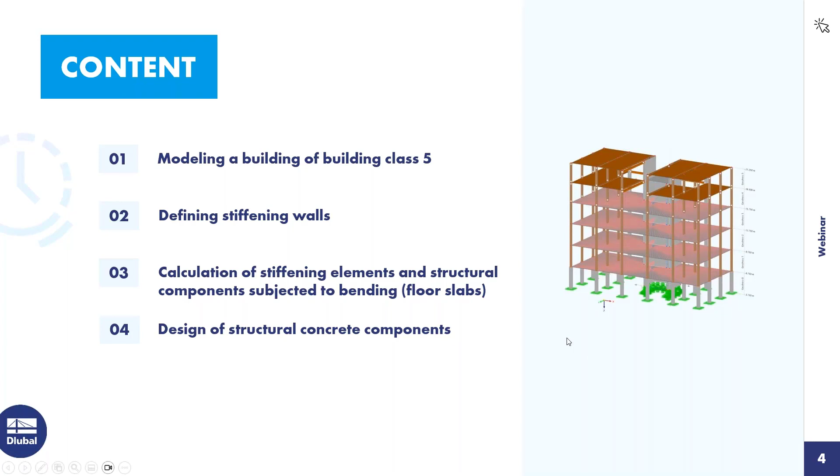To the agenda today: Bastian will start the presentation. He will model a building of building class 5. You can see that in the preview. He will define stiffening walls and will do the calculation. Then he takes over to Paul, and Paul will design concrete components such as a slab and a wall. Okay, then I hand over the screen to Bastian. Bastian, it's your turn.

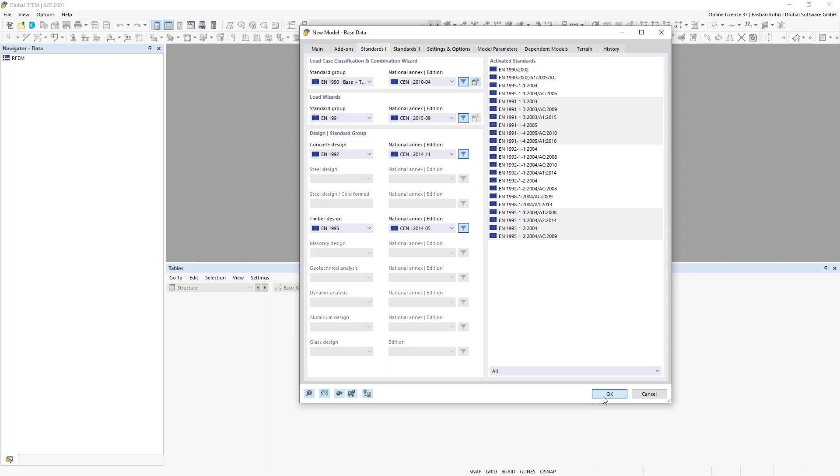Okay, thank you. Andreas said it already, I will do the modeling stuff. Basically, for this, I will define a new model with the add-ons we will need today. That's the Building Model, the Multilayer Surfaces. We will have a hybrid building made from concrete and timber. Therefore, I'm also activating the concrete and the timber design. But Paul will do the design process afterwards. So it's just for the sake of completeness. So we have the standards available here for concrete and timber, and also the combination for this.

Then I will at first define the ceiling made from concrete from the building that you just saw in the presentation from Andreas. I will not define thickness, materials, and cross sections in detail, as there are other webinars dealing with this. At first, I'm using a surface of 30 centimeters thickness with a C30/37 concrete material. It will be in the XY area with the dimension of 9 and 20 meters.

Then for the columns in the structure, I will divide the line here for arranging them by 2, and I will copy this for the other columns in the X direction 5 times by 4 meters. Okay, that was wrong, sorry. I had to press the control button, otherwise it will not work. So I will repeat this step, and now it looks better. I will do the stiffening of the structure by a so-called concrete kernel, which will be arranged from these nodes highlighted here, and therefore I will delete the 2 nodes there in the front.

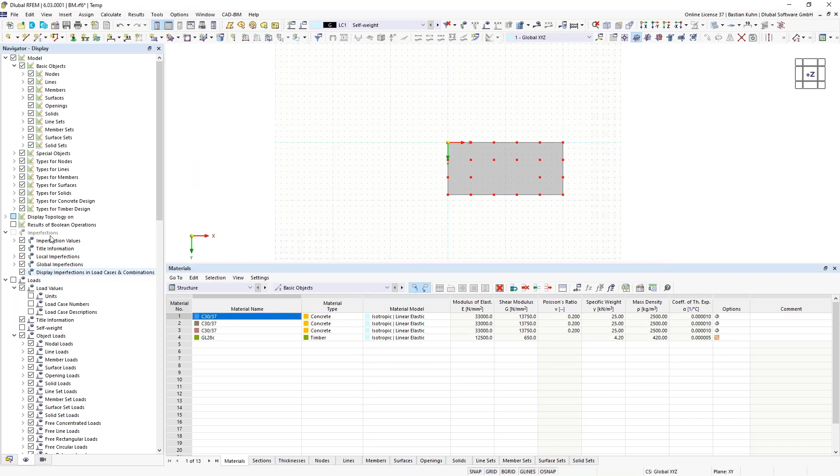The first story should have a height of 3 meters. Therefore, I'm defining these 3 meters here, and I will now switch off the surface and the lines from displaying, and will copy those existing nodes 1 time, also by 3 meters, but I will automatically arrange the columns in between. Therefore, I'm activating step links here and define the cross section. The section will have the dimension 40 by 40 centimeters and the same material as the first floor ceiling, but it is a new material.

Oh, I forgot the reinforcement, sorry. Happened to me twice now. Therefore, I go into the material database. Now you have that here, and I'm choosing reinforcing steel.

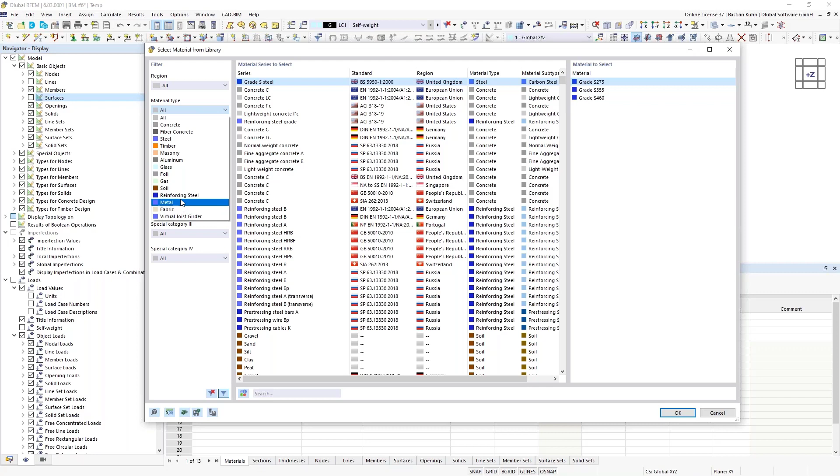Again, that's only for the design process, so not so essential now for the things that I want to show you in the first point, but it's important for the points that Paul will show you. Okay, now I can put the members and the surfaces back again in this area. That's what I told you, where I want to have the concrete kernel.

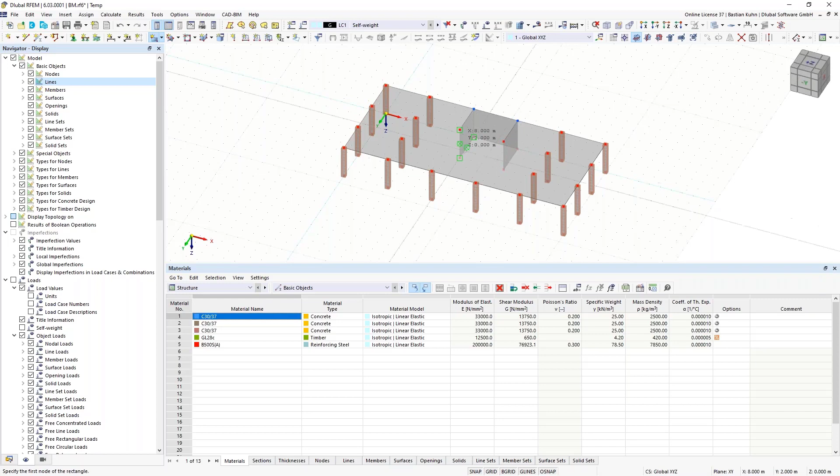And now I'm arranging this, and it should have also the same thickness as the ceiling, but once again with a new material. So I have 3 materials already consisting of the same grade. It just makes life a little bit easier afterwards. Okay, so here is the concrete kernel, and that's actually how the majority of the stories should look like.

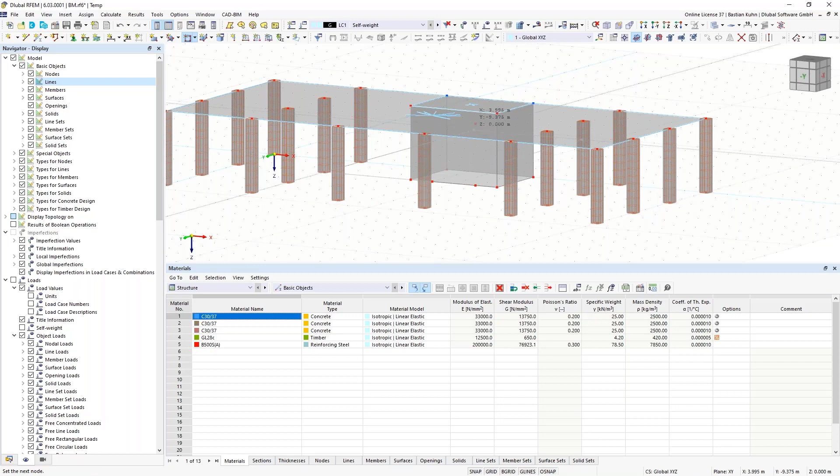I want to have an opening in this point here, therefore I'm dividing this line by 2 intermediate nodes and give the first one an X coordinate of 9 meters and the second one an X coordinate of 11 meters. So I have quite a wide opening of 2 meters, which should be enough. That I will also copy by an amount of minus 2.5 meters, and I will not copy anything inside that, so just a node, and define the opening in here. All right. Okay, so now that's done.

You probably saw that here are some kind of cells generated. That is something that is already needed for the Building Model add-on afterwards. And in order to arrange the cells correctly here on the opening, I need to divide this surface. Let me check the number. The surface number 5 by vertical lines completely.

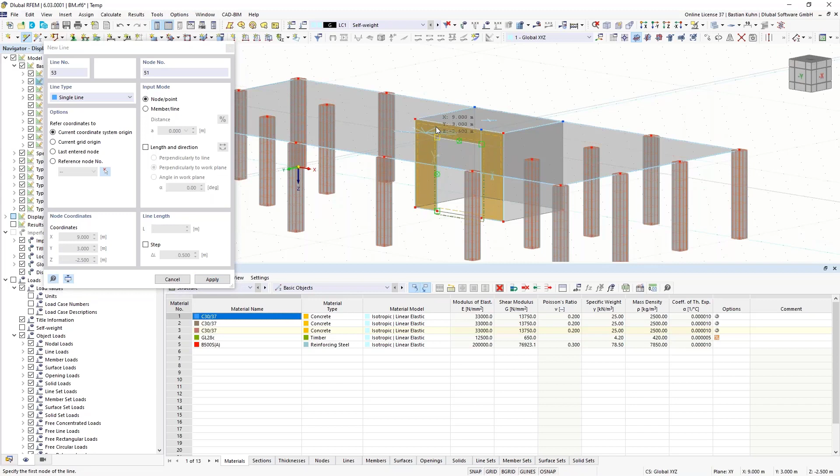And now I could copy the node, of course, just 50 centimeters above, but there's an easier function to use: the object snap with perpendicular inside here. And once I activated that, it's generating the line perpendicular to the existing one, and that fits, so that just goes a little bit quicker.

All right, so we need supports. That's what is missing right now. The bottom columns are from concrete, and therefore I can also clamp the supports. Okay, we can arrange it maybe this way and this way, whatever. So we need to delete those. Those are not sensible in here. Maybe they are a little bit small, so I can use the slider to increase the size a little bit.

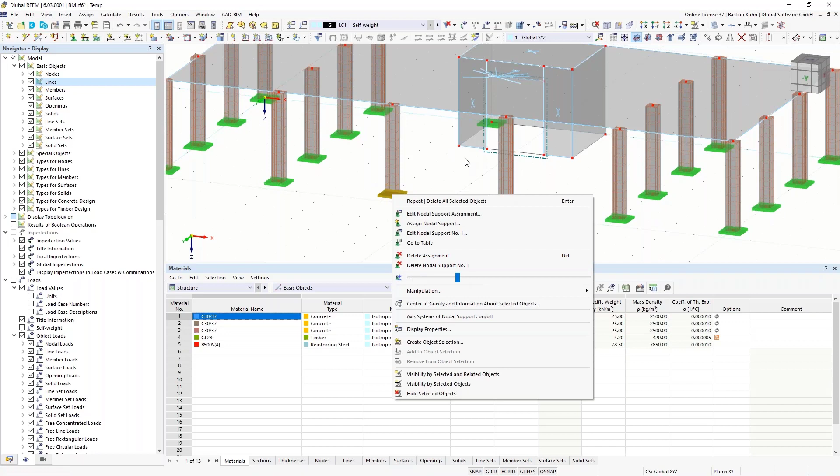All right. And now in the concrete kernel, I will also define line supports for the walls. They will be arranged local with a fixed movement in X and Z direction. So they only can bear force in horizontal direction of the wall and in vertical direction of the wall. Okay, so that is the first story, and it's good to go, I say.

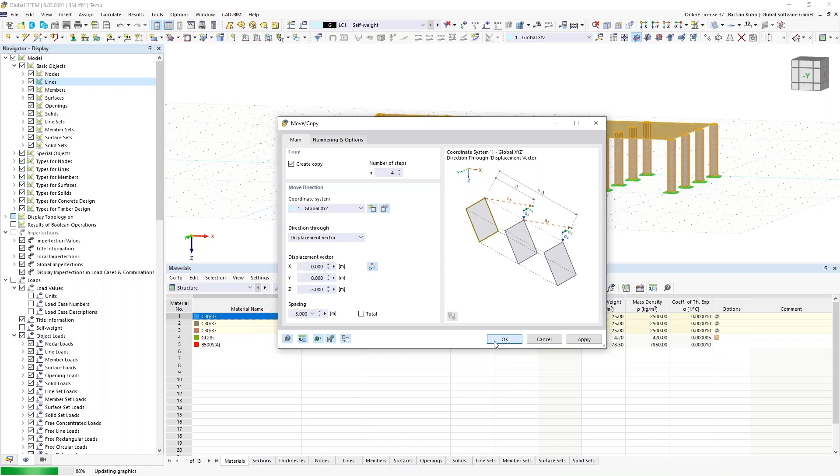And then we will copy this one 4 times. Again, 4 times by an amount of -3 meters. Then the building is already there. But we miss one story. And I want to show you that with this add-on, we are able to calculate also unsymmetric ground floor plans. So therefore, I'm defining the top story with a slightly different height.

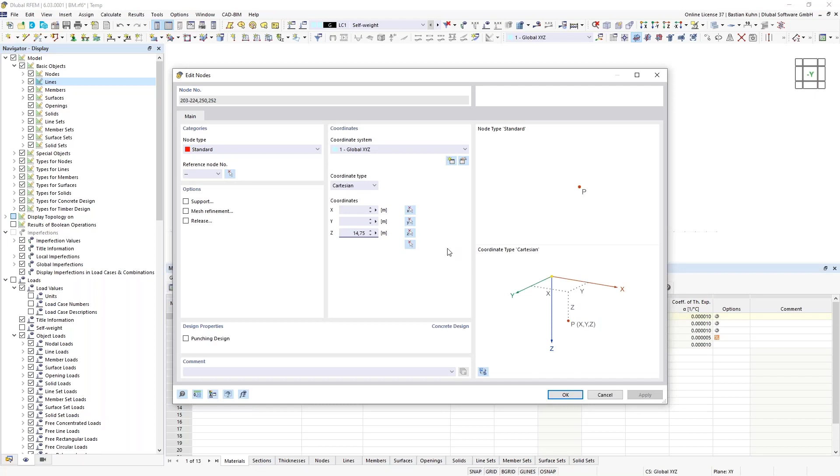Let's say we want to be very economic, and therefore we just say the top 2 stories should have a height of 2.75 meters, which will be round about this, but minus makes more sense. So, all right. Okay, so yeah, it's quite narrow here, but it's still enough, I would say.

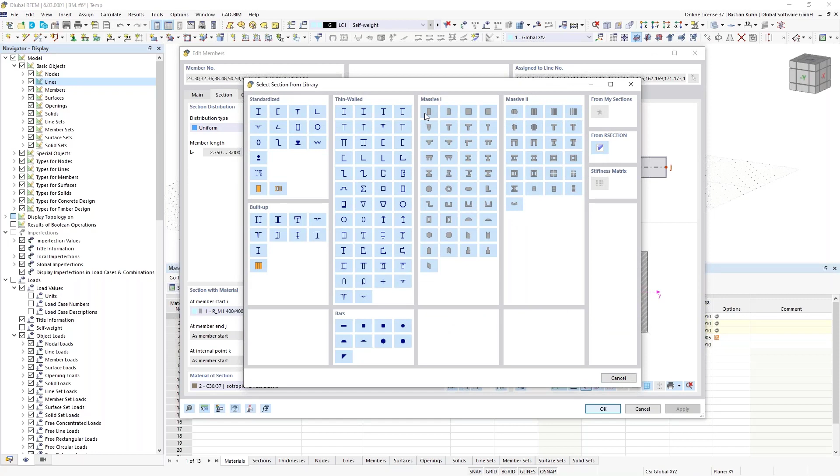I also said that we want a hybrid building, therefore the columns in the other stories should be made from timber, except those 2 ones in the back. So we will change them now by members edit and give them a new section in here. So a section of 22 centimeters by 22 centimeters. And of course, oops, that was wrong, sorry. A timber material. Therefore, we go into the material database. Now you have that there.

And I'm choosing a quite interesting product called Baubuche, which is perfect for designing columns in higher buildings, as it is light, but can keep the same or nearly the same amount of pressure as concrete can bear. So that's something perfect to be used for high-rise buildings together with timber.

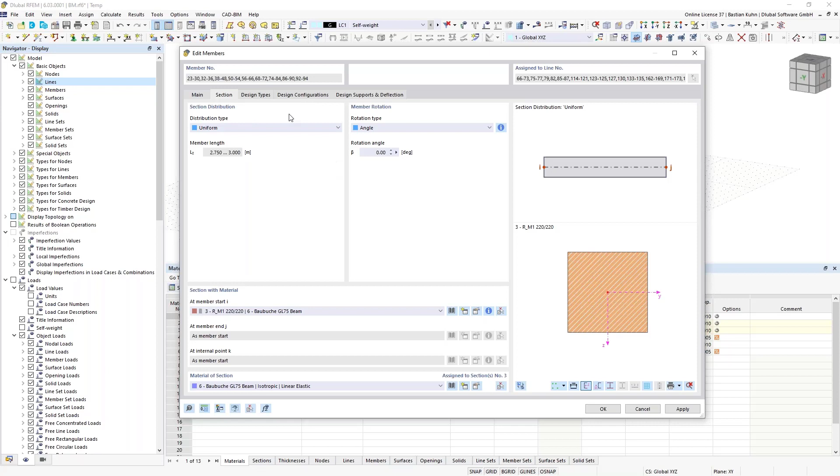Okay, the design types, configurations, and so on, that will be shown to you by Paul for the concrete, and it's the same for concrete, steel, and timber anyway, so we do not have to go too much into detail. The only thing that I can say now is that for the design types, we are assigning a service class 1 for the columns, as they are covered, or they are all inside the building. That's why we are using it this way.

Okay, this, and then these columns here, they should have hinges. I'm explaining afterwards why I only assign hinges in those stories after I have defined the building model data of it. All right, so that's UX, and we do the same for top and bottom.

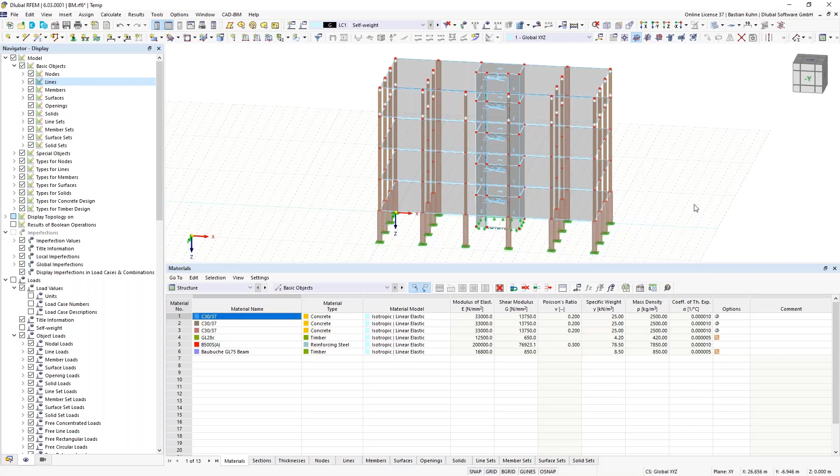All right, so that's here. We also want the top floor to be a little bit different. Therefore, we will delete this in here and now define cross-laminated timber for the top 2 stories of the structure. Therefore, we define a new thickness. As I had activated the multi-layer add-on, the thickness type layers is available in here.

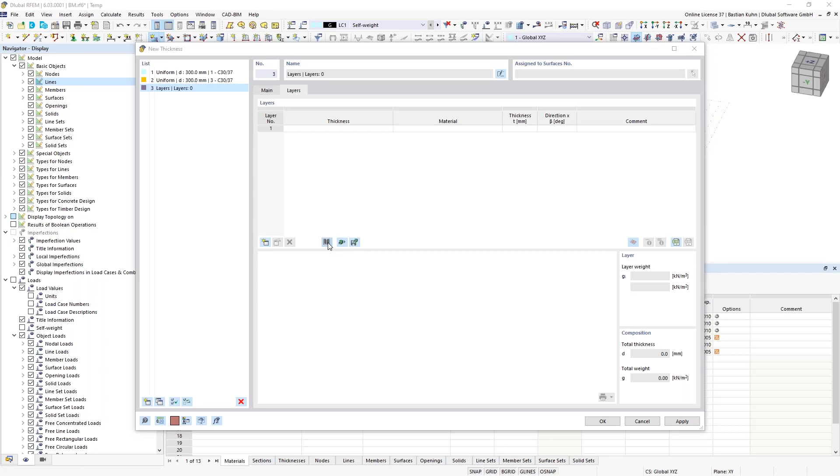And there's another webinar, probably Andreas will show you all the webinars afterwards, which is dealing with this. Just as basic information, you can define several layers of material in here. To keep it simple, I'm just choosing a material from the database, but user-defined definition is also possible. There are factors that you can see here that are also explained in these other webinars. Okay, that's the same as what I already showed for the columns.

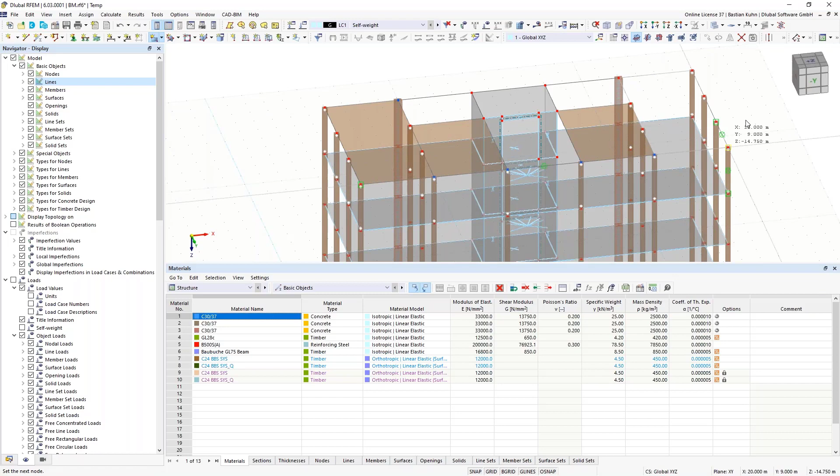So where do we want to have our surface in here? So from this origin, oops, that was wrong. So from this column here to this, and also from this to this. All right, and we do the same in here on the other side. We could have also mirrored it, then it would have been even quicker for modeling it. Okay, now we have quite a big overhang here, and we also have no stiffness in here. What do we do there?

Well, for sure, we will need some beam there. That's going to be a new member, and also a new section. We will choose the section 18 centimeters by 22 made from glulam. All right, member, and then we have it in here. There's something that has not been divided correctly. I will do so now. Yeah, looks good. Okay, there was something that looks strange to me.

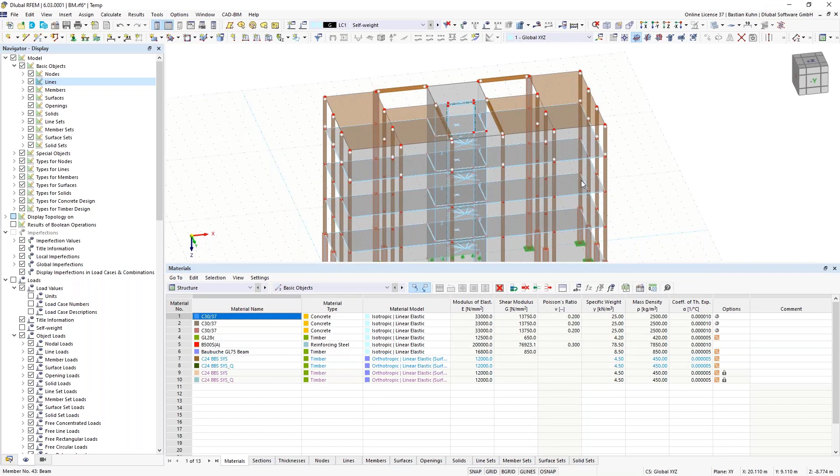I forgot to assign the moment hinges there also. I can add that quickly by selecting the hinges and choosing the same ones as for the columns. And for sure, those have to be eccentric. That can also be added here. So eccentricity, and we will have it underneath with an offset to the existing surface, and it's going to be this one. Oh, that was too quick. We need it also on both sides of the member. Okay, that looks good.

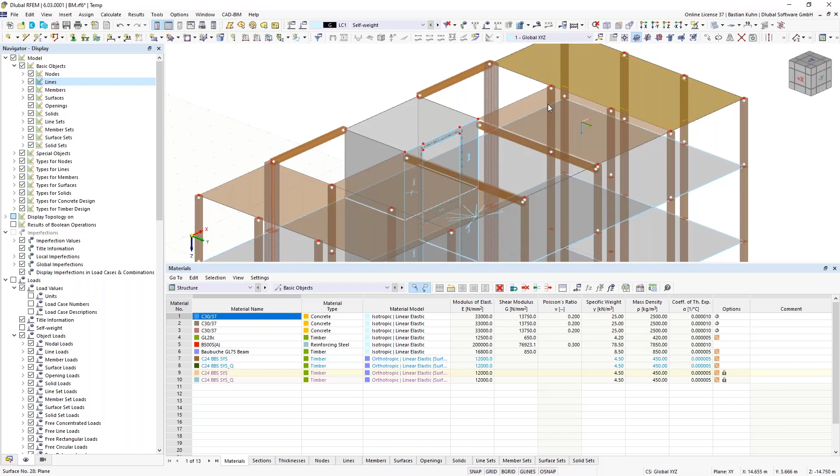Now, when you have a downstand beam under a ceiling, the CLT plate should be connected with some kind of slip or degree of freedom, as a moment-stiff rotation is not possible for timber in here. Therefore, we will insert line hinges via the dialog box. I'm not explaining that in detail, but there should also be a slip in UX direction. We will skip that and just use the moment-free rotation today on this surface. Okay, I hope I got them all.

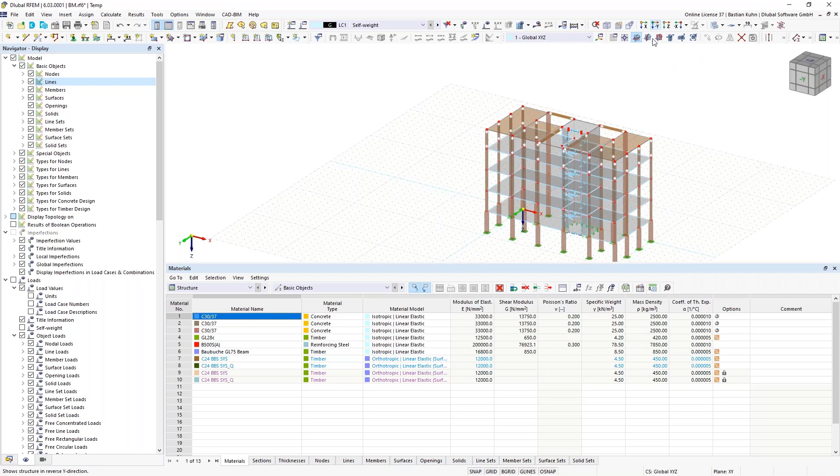We can take a look. A little bit small in the display, but we can use the slider to make that bigger. Looks good. So we have defined some degree of freedom in here. But we also need the last story. Therefore, this one here we can delete, and we will copy this by a value of 1 in x direction and minus 2.75 meters in z. All right. And in here, just to have it quite unsymmetric, we have that in here. Okay, here is open.

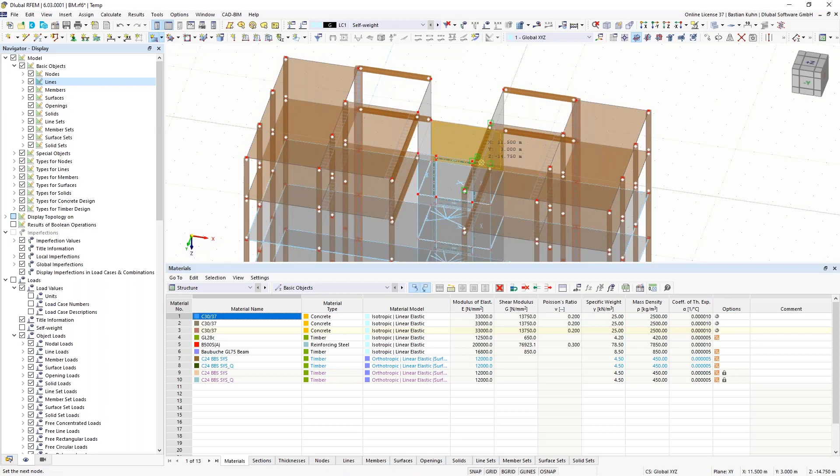Maybe we can also add a little concrete cover there on top. Therefore, we choose the first material. Okay, so that looks better. Go into the rendering, and now I think everybody can understand how this building is supposed to work.

Okay, loading we need to assign. But before we do that, we define all the load cases. So we have the live load, then we have snow below 1,000 meters, and we will also define wind, just to have something. Now the first load case should have an amount of 2 kilonewtons per square meter. So I'm choosing this here. I only have to do that for the first load case.

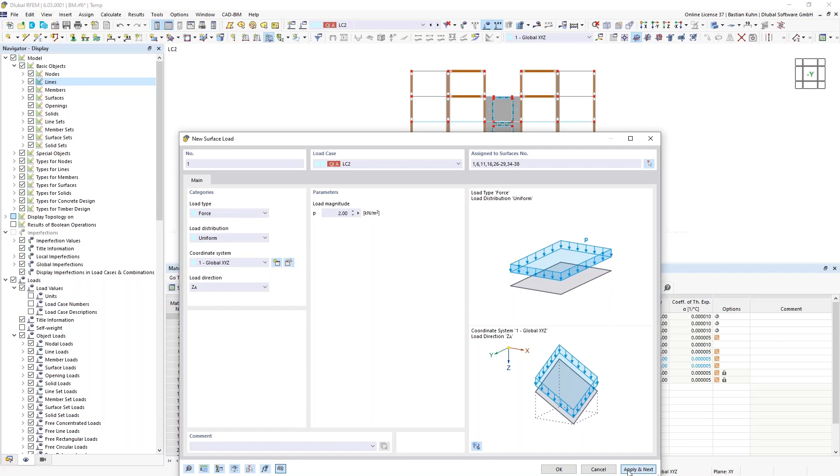For the second, I can actually copy those from here. So apply and next, and you see it in the back. There it is. And then we do the same for the second load case with another value. Apply and next. And now for the snow, we just pick the roof.

And a different value of 0.85. Okay, that's the load. We will also use the load wizard for the wind load. We have the same for the snow load, but we simplified it a little bit here. We can choose the base corners for the wind load, and now also the roof.

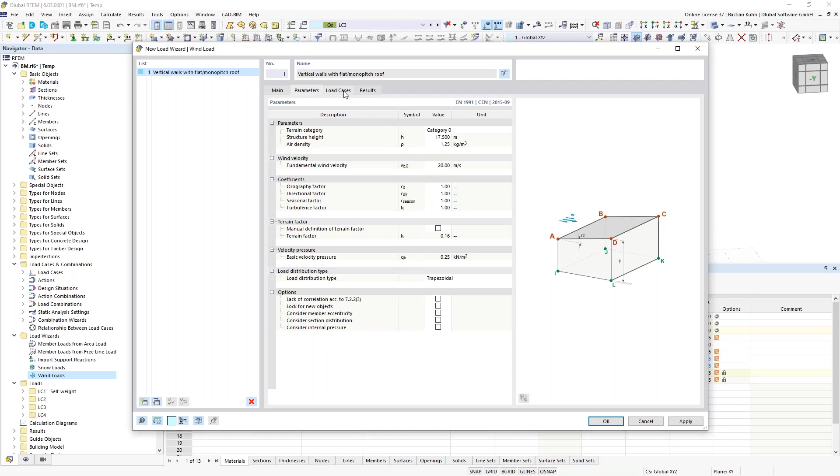Okay. We will just assign the wind load on front of the building, just on the weak side. So that should actually be the design giving value in here. We are choosing category 0, does not really matter too much, and let the wind load generator generate the wind load on it. So if we move to load case 4, you can see that horizontal load is assigned onto the building.

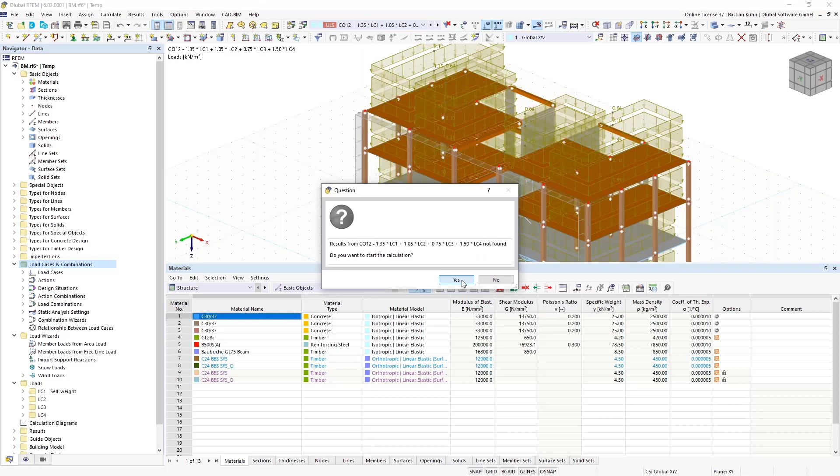Okay, so I forgot load cases and combinations. Okay, we can keep a small eye on this. Design situation, I'm just designing ultimate limit state in here, according to first order theory, and let the program calculate my combinations. And now if we look, for example, for combination 12 and the results, you see there's a one-time calculation done for this building.

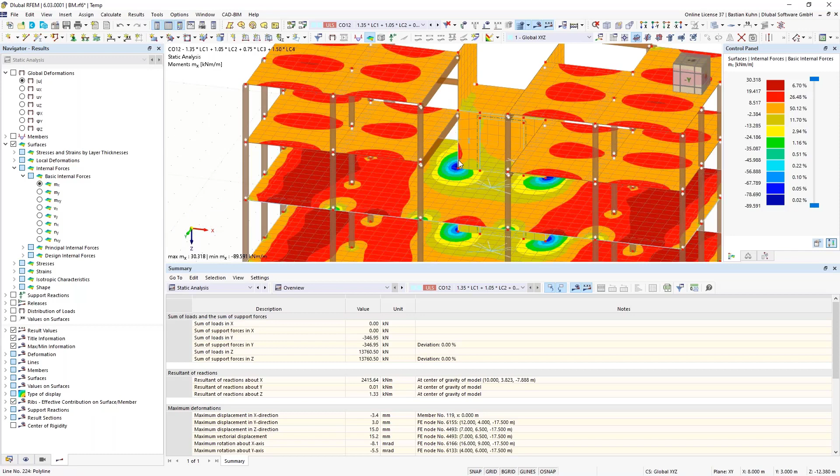And now without the building model add-on, it's possible for sure, because we also do that in a lot of other webinars to design it. But you see that you have now mixed the inner forces of the walls. Let's say we go for internal forces, moment X. So you have the ceilings in here and also the walls, and you have mixed that all, and you have no clear way to separate between walls and ceilings in here, and that is now something where the building model add-on can help you.

Therefore, as we have activated the building model add-on, we will assign building stories. So we go inside in here and define new building stories. There are several ways to generate stories in here, but the usual way probably is to design a building and then assign the stories to it. And that's what I'm showing you here today. The other ways are all described in the manual.

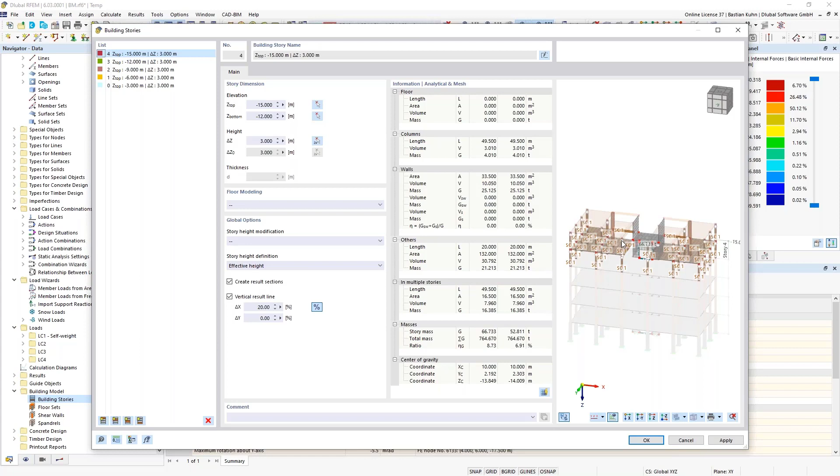Okay, first elevation is -3 meters. And now we can more or less automatically arrange all the other stories. You see now that the 5th floor has a different Z coordinate. I need to pick it again in here. And yeah, then use the last floor more or less automatically. Okay, this I've done now.

And for the stories 0 to 3, I'm choosing the floor modeling rigid diaphragm. There's also an object load transfer only, but I'm not explaining this today. Load transfer, just as a short explanation, is a kind of surface that is only distributing load. If I should have done the load assigning correctly for the snow, there where you see the holes in here, maybe you already realized that, I should have assigned a load transfer surface, but for this webinar, I did not model it or use it today.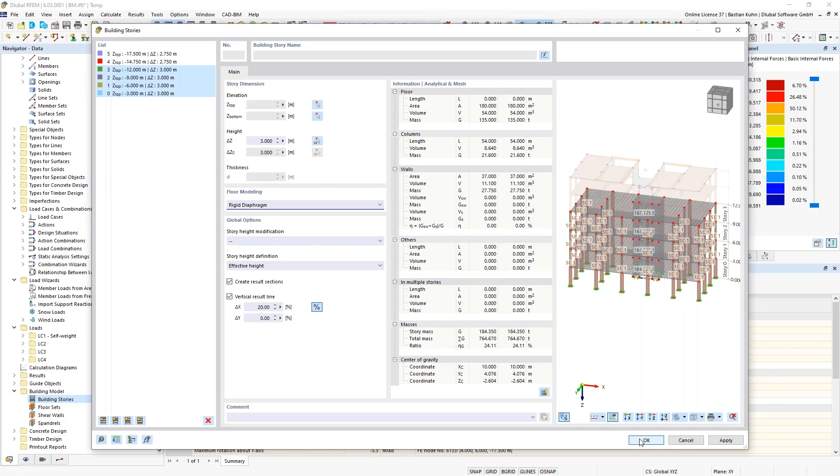Okay, so for these stories you see in here, I'm assigning rigid diaphragm. And now when you press OK, it's deleting all the results. And now you see here a lot of red lines. These are rigid couplings, and you see a blue bubble in here. So the lightest one is on the top story, 28.59 something tons. And then, concrete is the heavier material, it goes up the more down you go. And these red lines, or these rigid couplings, are centered in this mass center, and they are connected to each of the columns or each FE element in each story.

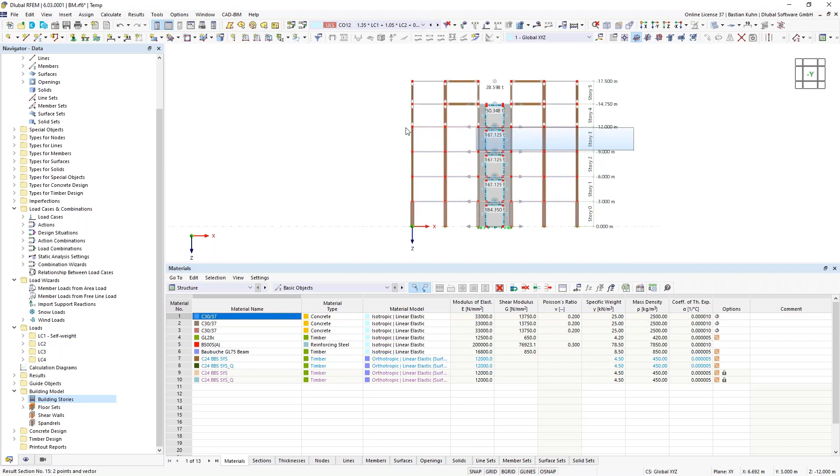Maybe we take just a look at one story. Therefore, we will use story 3, for example. Visibility by selected and related objects. It should give it to us. I think it's not nice. Hold on. Yeah, maybe we just use this one story here. Yeah, that's what I want.

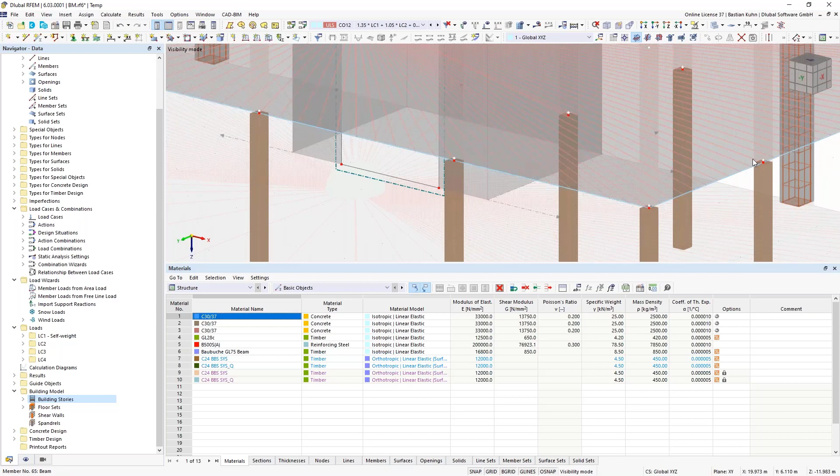So you see they are all centered in here. There are the surface cells. They are only on these smaller objects in here. And now each of these points is connected rigidly with the center. Not completely rigid, as the ends of this rigid have a moment hinge, and that's also the reason why I did not define moment hinges on the columns in here, as the ceiling itself is considered as a ceiling. It may sound a little bit stupid, but that's an important point.

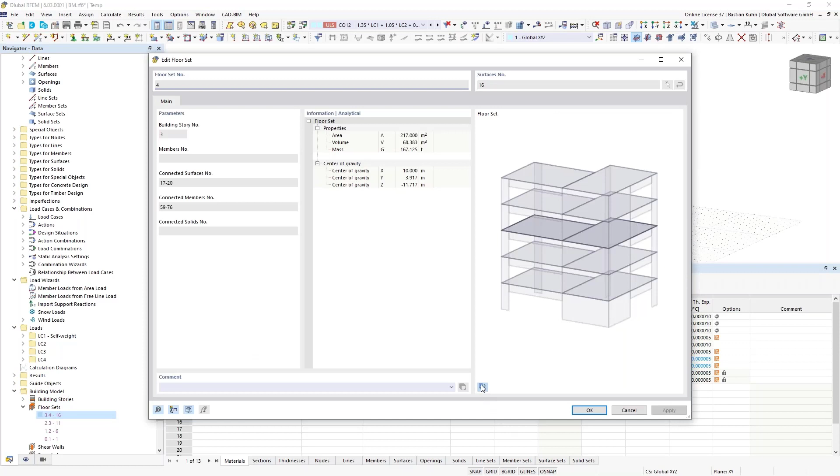Yeah, that's the first change we have from this. Now, what else do we do with the building model add-on before we calculate the building? We can define, if you look down here, floor sets. That's already done, as I had defined it in the building stories, but I can just take a quick look at this. There you see that each of the ceilings or the surfaces there has now a floor set.

If we double click onto the surface, oops, sorry, that was wrong. That's not what I wanted. I wanted to click on the surface here. Paul will show that to you afterwards for the concrete design, as this is the main point with it, what you can do. But you see that originally there was a standard surface thickness type. And now it is overwritten by the building model add-on with floor slab rigid diaphragm.

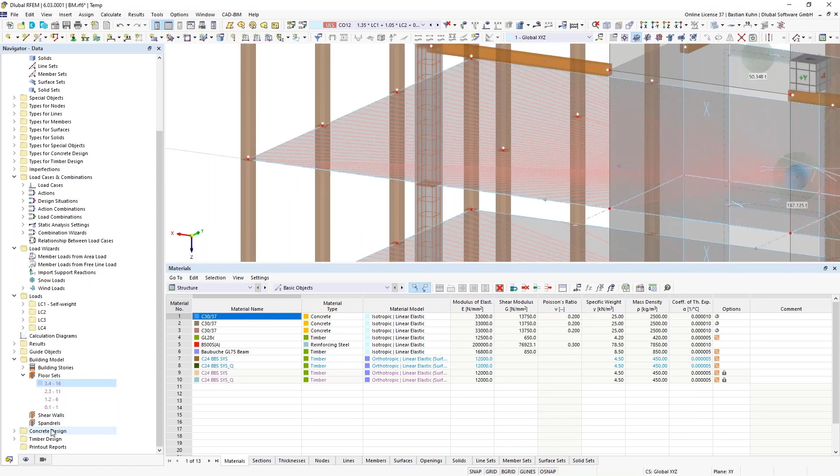So this is all organized here, and now we can define shear walls. Shear walls, yeah, I don't think I need to explain what shear walls are. They are in the concrete kernel in here. So at first I'm using the one in the rear. Oops, come on. So there's none here, then you cannot pick it. All right.

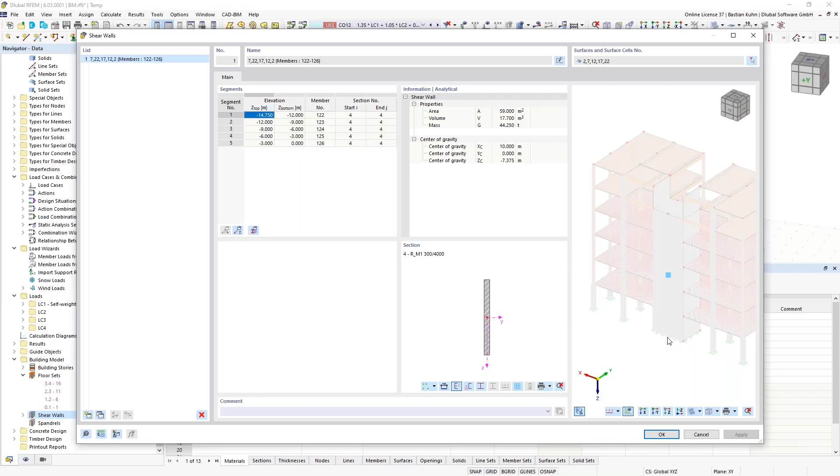Should have switched on the rendering, because now you can see what it's doing there. It's generating a section that goes from the first story to the fifth story. And I'm doing the same for the sides, as those walls are going from the first to the fifth story. All right. Okay. And then also the opposite side, I'm doing the same.

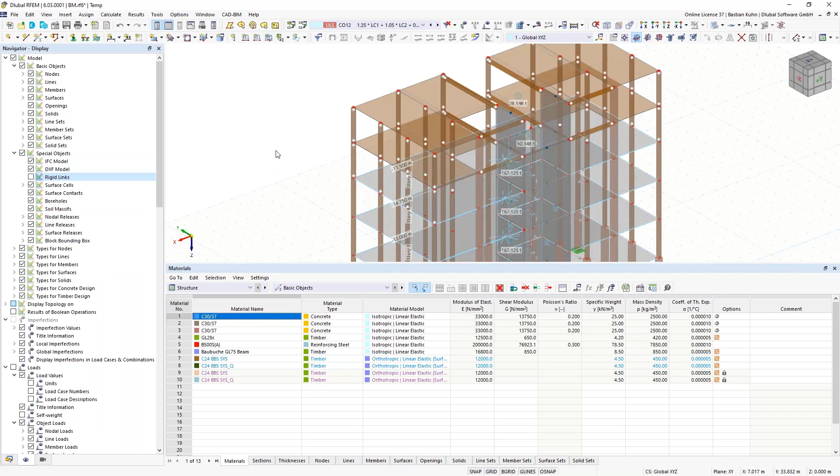Okay. Oops. All right. Once again, okay. And maybe I can switch off the rigid links. Just looks a little bit better in my opinion. Okay, now that's all assigned. It's automatically generated result beams that Paul will design.

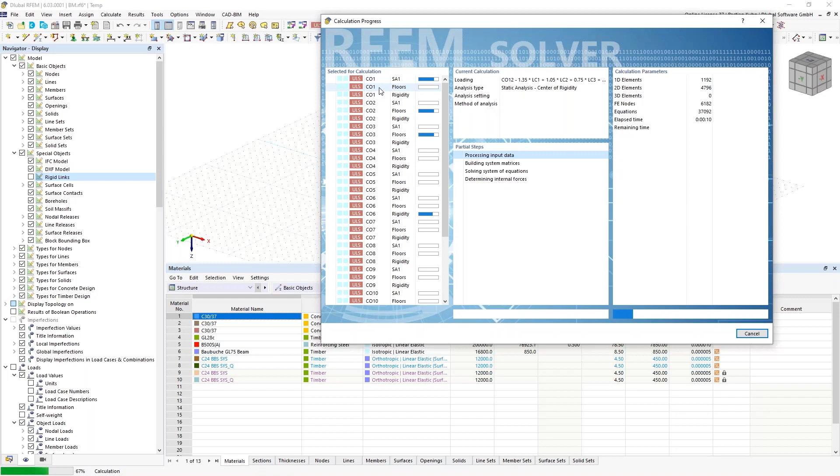And now we calculate the design situation 1, so we press calculation in here. And if you look for the calculation progress, here now the mesh is generated. But now you see combination 1. First entry is combination 1 static analysis. Second is combination 1 floor stiffness calculation. And third is rigidity. So every combination that we have, 13 by its number, is calculated now 3 times.

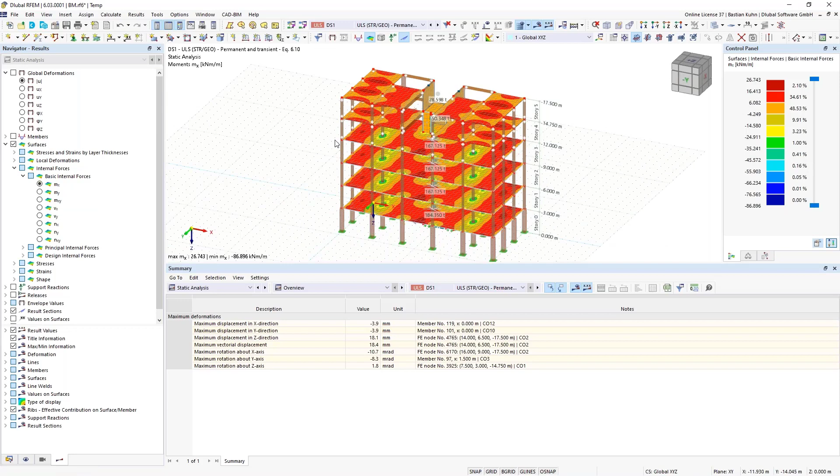What's the reason for this? In the building model add-on, and we watched combination 12 before, there you saw that we only have static analysis. So we still have the original one, what you have without the building model, but we have 2 more calculations that it's doing. And that's where the building model add-on helps you to show or not show results, basically. So if you look for the design situation, you see in the static analysis absolutely no difference to what we had before. The problem I just mentioned when we looked at combination 12, it's all there. So there's not really a benefit of it.

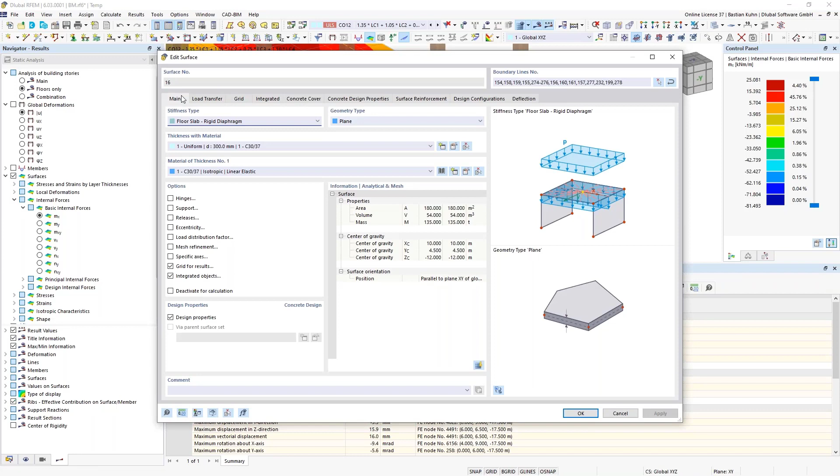But if you look for combination 12 again now, so we click on this here, you have a new entry, analysis of building stories. And now it's separated. You see the main point, which is more or less my shear wall design that I have in here. And those can now be calculated, for example, in the timber design or in the concrete design add-on. The second one is the floors only. So you see, even though the floor stiffness is overwritten by rigid diaphragm, you still have a vertical bending, which you would not have with only rigid diaphragm.

So in the vertical direction, we are using the stiffness of the usual surface. For the stiffness of the structure in horizontal direction, we are using the rigid diaphragm stiffness, but for vertical, the original stiffness is used. That's why these 3 design rows, I don't know if that's the right word, or times are done in here. Okay, and the combination, that's then still again the original one that we have.

I have explained the following in the previous webinar of the building model, but just to have mentioned all the options from the building model, I also want to show you the results by stories. Here in the static analysis, you see you have a location of a resultant story force. You have the story forces, and you see we only have assigned horizontal force in y direction. That's why we only have story forces in y direction. The interstory drift is the same, for the same reason, because I assigned the load only in this one direction.

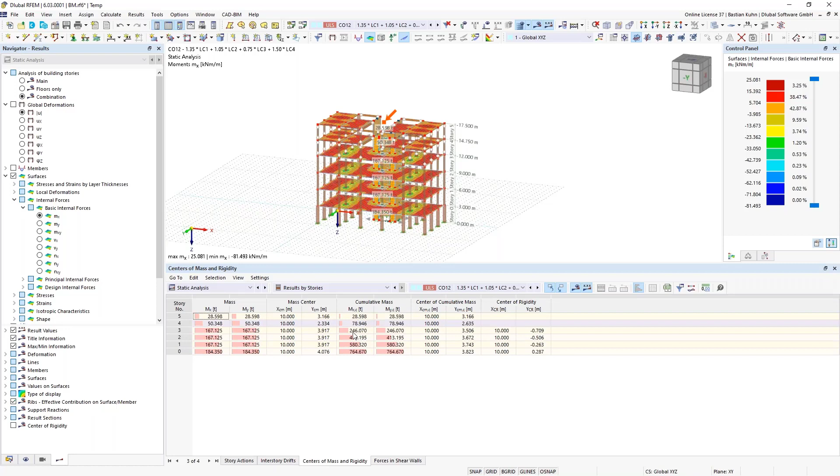And additionally to the center of mass in here, we also have a center of rigidity. Let me take a look. It should actually be in here. Wait, we can just switch off this result.

Description. I had found it before, but not yet. I have to look for it. Surface cells, surface releases. No, not yet. But you can display it. Display topology.

Oh, elevation mass. No, I apologize. I will give the word to Paul and take a look where it is, and then hopefully when he has finished his presentation, you can, or maybe he already knows and can show it. Otherwise, I will show that to you after he has done his presentation.

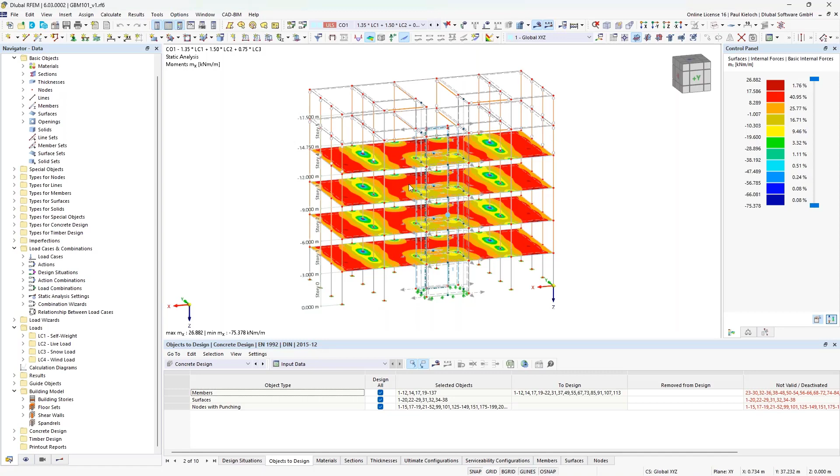And I have also assigned here some mesh refinements, nodal mesh refinements, and surface result adjustments. But those are basic functions from RFEM 6, so I will not deal with that today. I will directly concentrate on the features of the building model and the combination with the concrete design add-on.

So I would like to start with the shear walls at first. At first I will explain to you the context of designing shear walls in concrete design add-on that were generated by the building model add-on. Bastian has entered here these shear walls on this exterior wall here, and he has just selected, for example, one surface.

If I would, or like he has done, just select one surface, then the program would generate us a rectangular section, like in this case, and it will automatically create a member type result beam. In the current development state, we are able in the concrete design add-on to design this section, so to enter the reinforcement for this rectangle section, and then afterwards to perform the design checks.

Of course, you may ask yourself, why haven't we selected also the combination of this wall, and this wall? So maybe you would expect a shear wall, with a member with a section of C shape or L shape, like if I had selected just these two surfaces. That will be possible in the future, but in this case, if you would assign, let's say, these three walls, the program would generate a section with a C shape, and then it would not be a rectangle section like in this case, but it would be a C shape RSection.

So then you would get here the wording RSection, and what we are still in development is an interface of RFEM 6 and our cross-section program RSection. In the future, it will be possible also to reinforce such cross sections with an L shape, T shape, or C shape in RSection, define the reinforcement there, and then import it back to RFEM 6 and do the design here in the concrete design add-on. But this interface between the two programs is not ready yet.

That's why we have selected for the shear walls just one surface, and we are running the analysis now with regular rectangle cross sections. Just to give you a background why we have selected just the individual surfaces here now and today.

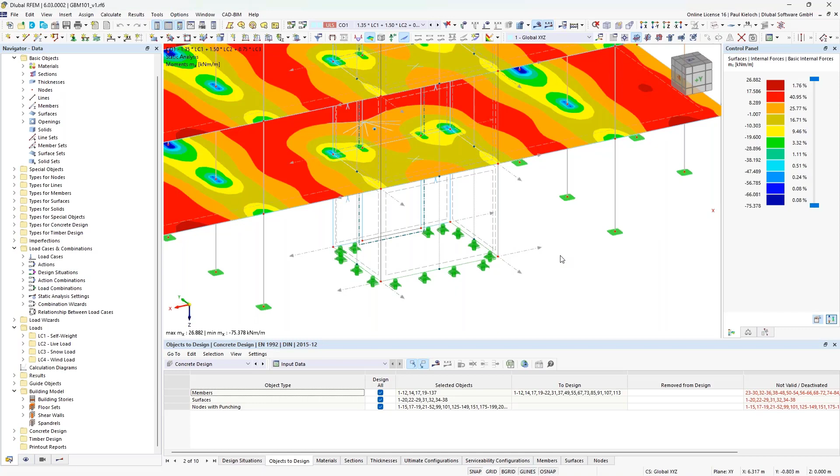When I want to start the design process of these shear walls, then I can basically select them just with clicked or pressed Control key, open them, and like I said before, we are getting a result beam here with this rectangle cross section. And like for every other beam that you already know from RFEM 6, you can activate here these design properties. If these design properties were activated, then you get here the tabs for the concrete design add-on.

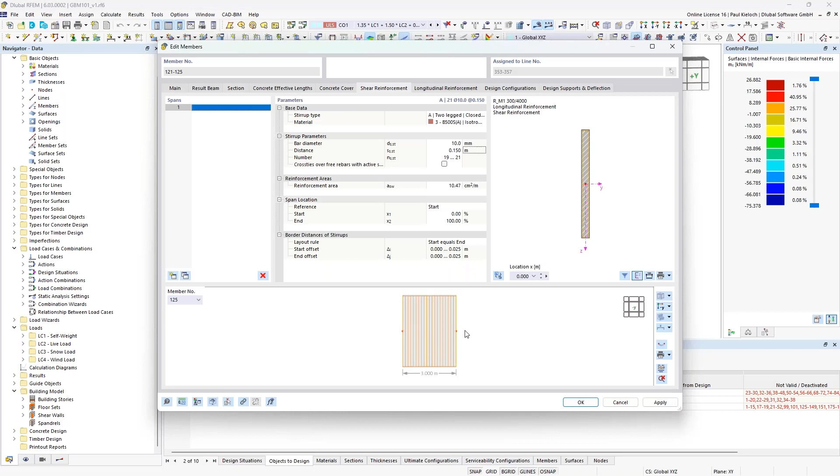So, for example, the concrete effective length, the concrete covering settings, and of course, shear reinforcement and longitudinal reinforcement. So in my today's example, I would like to apply a shear reinforcement with a diameter of 10 millimeters and a spacing of 15 centimeters. The program automatically adjusts here the rendering of this member. Then I can click on apply.

And then I'm switching over here to this next tab, longitudinal reinforcement. And there I will switch the rebar type to type D line. And with this type, I would like to apply a reinforcement on the outer lines of this section.

And therefore, I will apply 26 rebars, a number of bars of 26. In this example, I'm using a diameter of 12 millimeters. And now with the settings, I have to define on which line of this section these 26 bars should be applied on, so I will use here from left top side to left bottom side.

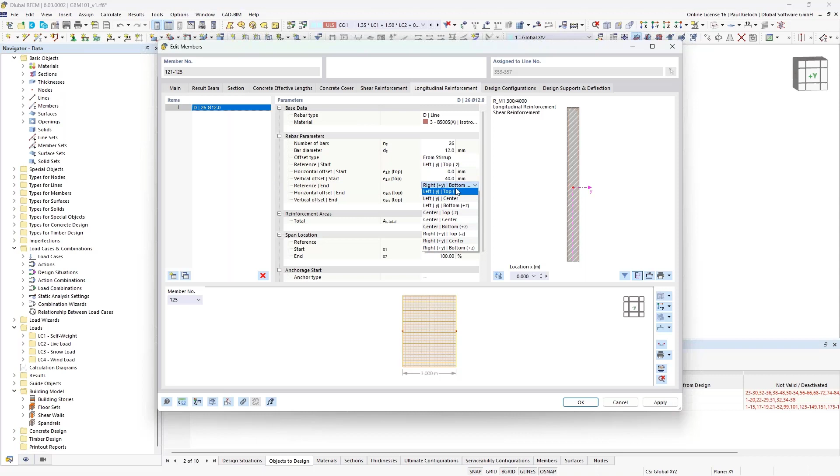Okay, then you see here already on this left side of this section these 26 bars. And what I also will apply here is the offset. I would not use 40 millimeters here, but 20 in this example, just to show you how you can work with this dialog. Then I click on apply.

And now I want to copy this item to the other side. Therefore, I'm just selecting it here, clicking on copy. And then I'm selecting this second item, and I now have just to switch the reference from the start point. Now it's the right top side, and then on the bottom it's the right bottom side. And then it looks like this. I click on apply.

And now you see here this reinforcement over the height of 4 meters for this section.

Now I would like to show you a new feature which you will get in the next version next week. So I'm working in an internal version now, and I would like to give you a short demonstration about a new reinforcement type. It is called cross ties. Starting next week, in the new version, you can assign cross ties to all of your cross sections. I will show it first here for this, let's call it wall section.

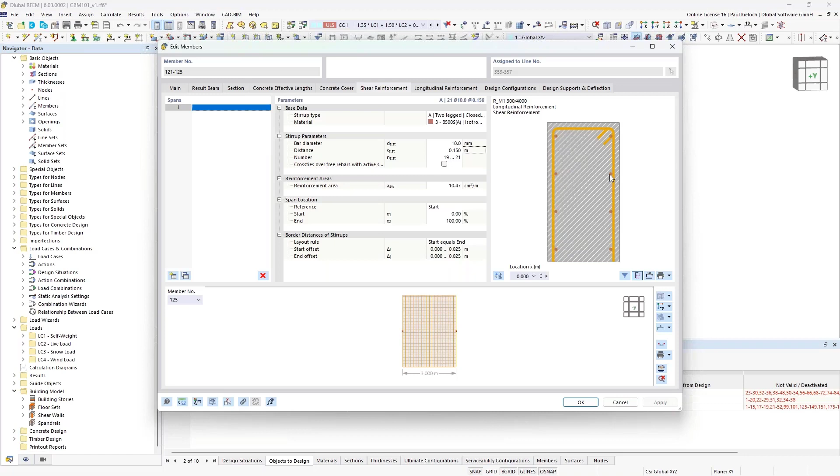So if you activate these cross ties, the program will generate these rebars from one free rebar to another. And you can, with this activated check, also deactivate the cross ties that you do not need in your section. So for example, you can go through and define that you don't want to apply these cross ties on every rebar. You can just click in here. It's a little bit of clicking, I think, for this height of the section, but I decided to do it also for this section just to give you a demonstration of how it works.

And as I said before, it will be available starting next week with the new customer release. So let's do it in this way. Click on apply. And then I have defined the reinforcement here, including this new type, cross ties.

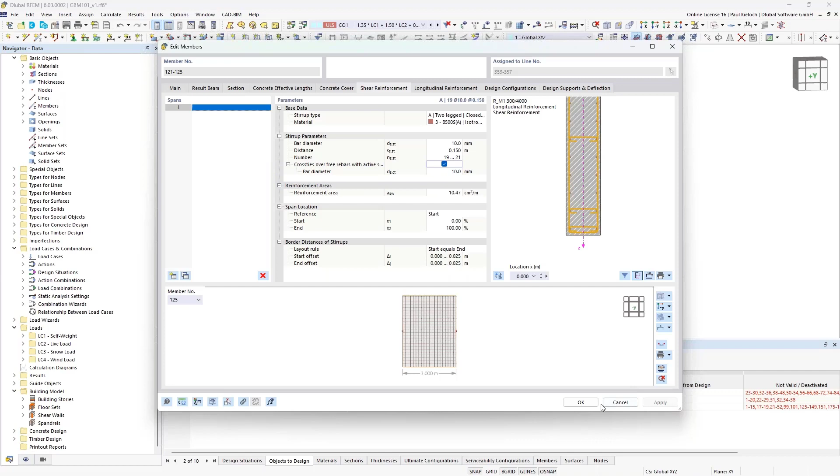If I click on OK, I can control the settings also in the rendering. So therefore, I will switch to the display navigator and just click here on types for concrete design. And then you would see here this reinforcement for this member, including these new cross ties. I will switch this off just because maybe it looks a little bit too confusing if I let it stay activated.

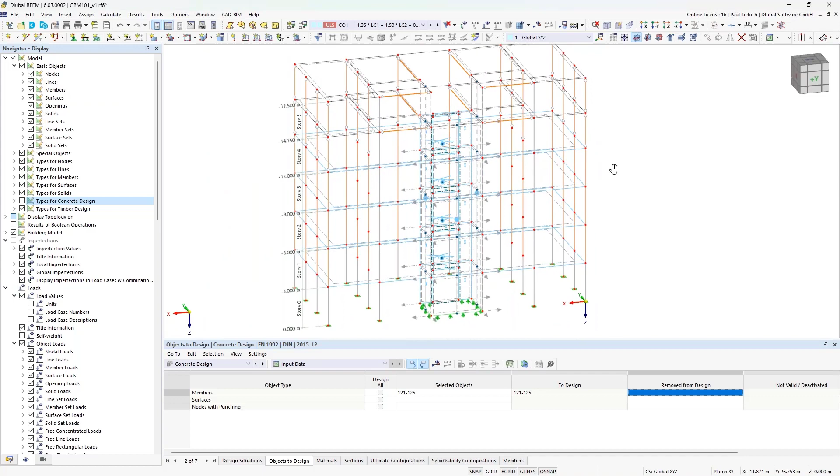So those are my members for the shear walls. I will afterwards do the calculation only for the new object. So I'm deactivating here the checks for design all, and now I'm selecting just the objects with new features here in context of the building model add-on. So those are our shear walls here. That is okay for the first step.

If I'm switching back to the data navigator, then we have here now the shear walls defined. And what you can see here now is a new type, spandrels. And with this type spandrels, or object, you can basically define spandrels or generate spandrels, or also deep beams.

We can use for the spandrels the regular surfaces, or like Bastian has generated before, the surface cells. So these are the cells with the blue, light blue border lines here. Therefore, I'm clicking here and creating a new spandrel, and you see here the options.

You can select either a surface or a surface cell for creating a spandrel, and while creating the spandrel, the program will once again create a result beam and automatically create the correct cross section for this result beam, and also assign the correct surfaces to the result beam. So if you're using the building model add-on, the former process, which you maybe also know from RFEM 5, to create a result beam and create a section for the result beam and assign everything manually, that can now be done automatically by using the features in the building model add-on.

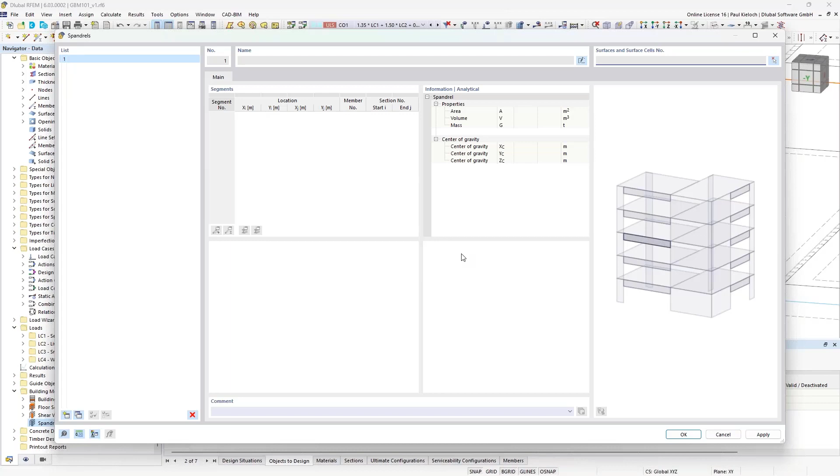So I can select a cell, starting here with this one, and clicking on apply, and then you see the program has automatically created a section for our result beam. I can just continue, create a new spandrel, selecting the next cell, clicking OK, then the next one, zoom in to find the right cell, 19, then the next one, okay, and the last one is this one here. I have done this now for these horizontal cells, generating these result beams by clicking on the cell.

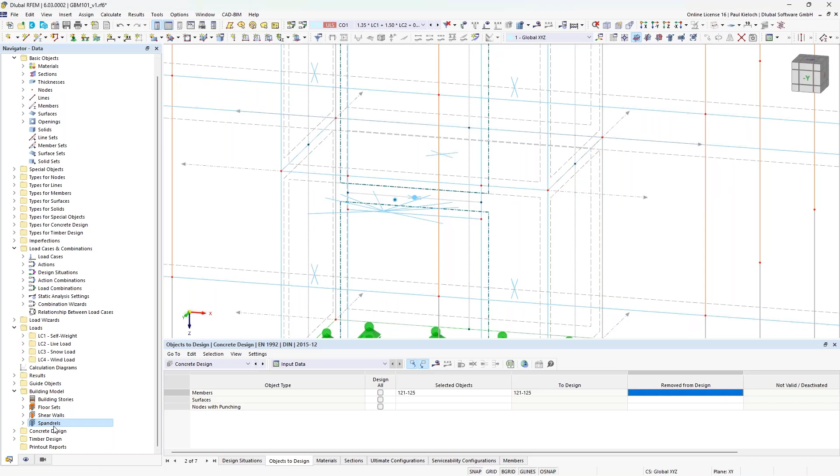Of course, like I said before, you can use the regular slabs to generate a deep beam by using this object spandrel, or you can combine multiple cells by clicking multiple cells to generate a larger spandrel. But in today's example, I have just used the cells upon the openings.

So after the spandrels were generated, I will open the first one here. As shown before for the shear walls, I can activate the design properties for this object. Once again, I can change the spacing of the shear reinforcement. If you click here, you can see how it looks. Here we have once again our free rebars, so we can also activate our new cross ties, but I will first switch to longitudinal reinforcement and change the settings here.

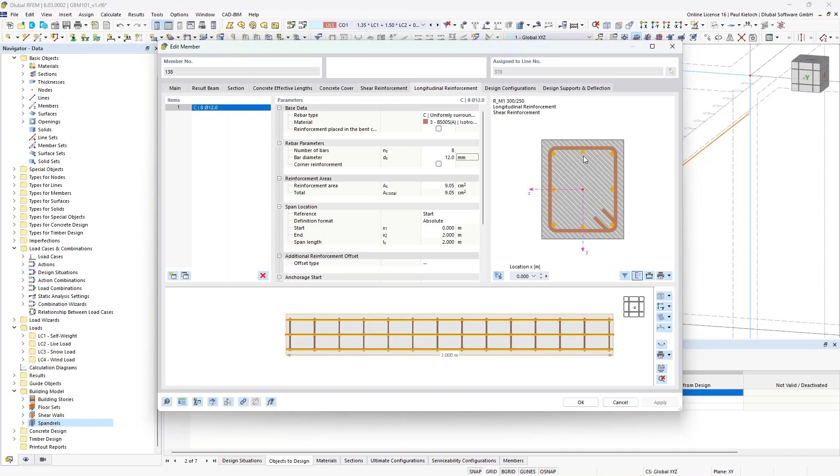I would like to use uniform surrounding and 8 bars with a diameter of 12 millimeters. I click on apply, and now I have on each side one free bar where no stirrup was assigned. So I can go back to shear reinforcement, and now I can also click on cross ties over free rebars, and then it looks like this.

And here now, if this option was activated, you can graphically activate and deactivate these shear links. These stirrups or cross ties will be considered in the shear force design check and also in the detailing design checks.

Because we are considering these stirrups or cross ties in the shear and detailing design checks, we have currently implemented cross ties for the Eurocode, Eurocode 2, including the national annexes. If you would like to use this cross tie type for the American standard ACI or the Canadian standard CSA, you have to wait a little bit. We will release this for the other standards as soon as possible, but next week we will release it first for the Eurocode.

Okay, in my example today, I will not apply them for the calculation. I wanted just to show you this new option in context of this webinar. Okay, I'm clicking on OK now.

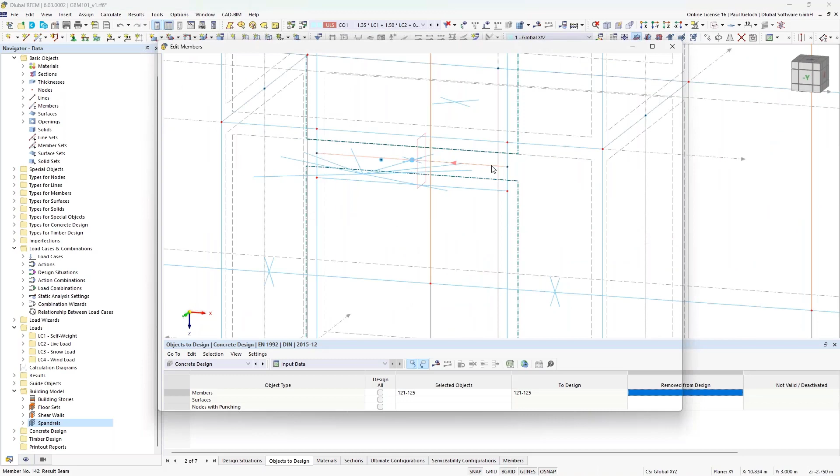And for the other members, we'll select them just by holding the Control key, doing a double click on the selected members, and then I activate once again the design properties. Now I can use this button here to take over the settings from this member.

And by doing so, we have the settings regarding the shear reinforcement already done, and also regarding the longitudinal reinforcement. I will just change the amount of longitudinal rebars to 10 rebars with a diameter of 12 millimeters. So I will apply this reinforcement for these spandrels here.

So we have now defined our shear walls that are basically result beams, I think in most cases vertical result beams, and here these spandrels, or let's say maybe also you can call them deep beams. It's up to you how you use this function. And I guess these objects will be in most cases horizontal elements.

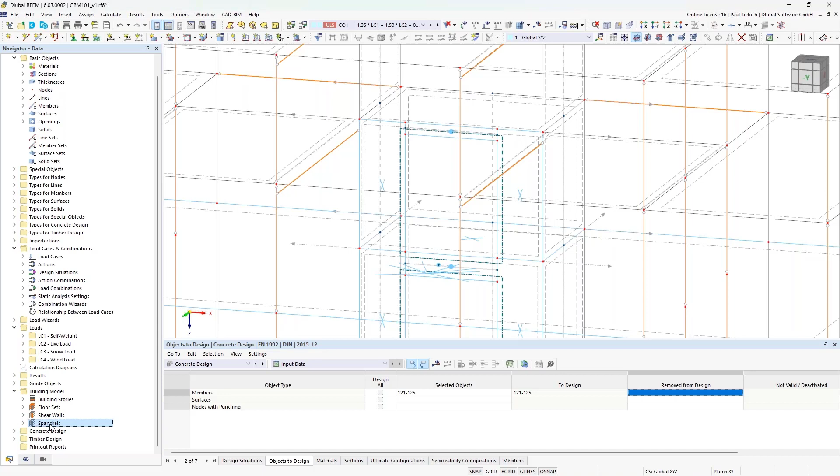So we have defined them, and I just have to select these members now to design in the add-on. Confirm that with OK. And here I already have a check if no member number is here, in this case not valid or deactivated, then I can be sure that all settings were set up properly for the design in the add-on. So that is already a first check whether all settings are okay.

Then I will save this state and go over to the slabs.

Like Bastian already said before, if you activate the building model add-on, then there is a new stiffness type for the slabs. The stiffness type is now called floor slab and rigid diaphragm. So that means, like Bastian already said before, the calculation process is done in 2 steps.

For the floor slab, basically we perform a 2D calculation for the individual slab. The second step is the calculation as a rigid diaphragm. In this calculation process, the program basically transmits the horizontal loads on the exterior walls into the core of the building. So it's just transmission of horizontal loads.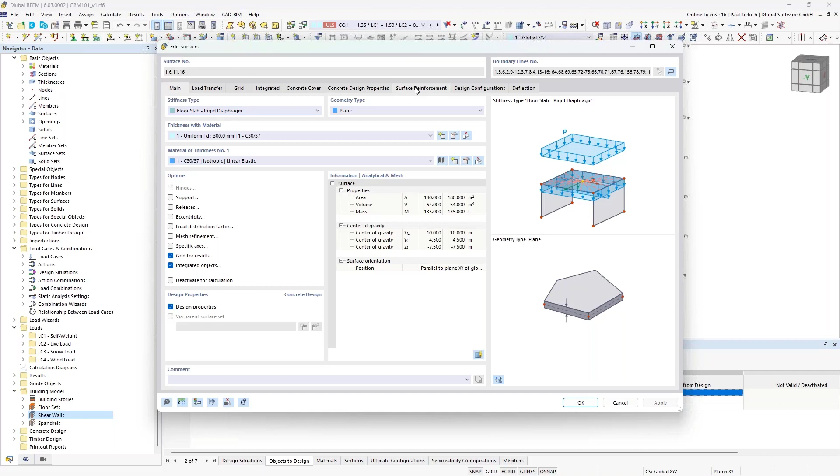For this 2D calculation of this floor slab, we have, of course, all these already known settings for the concrete design add-on. So like concrete covering, concrete design properties with the reinforcement directions, and surface reinforcement. So now I can set up here for these 4 surfaces a mesh reinforcement, for example.

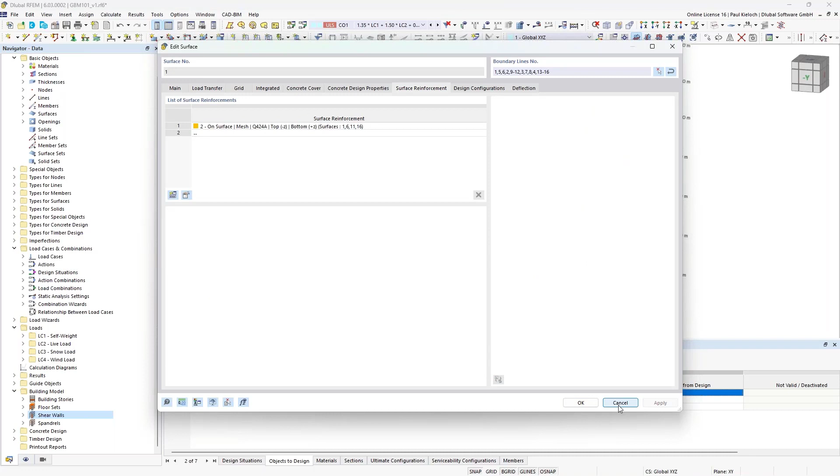So I can switch the reinforcement type here to mesh, and in my today's example, I will use the German product range and use here this mesh for the calculation. Click on OK and on OK, and then it will be correctly applied here, exactly, and I can select these surfaces here for design in the add-on.

Okay, and to show you the last feature for the building model today, I will also apply two surfaces here that are calculated in the standard approach, or standard stiffness. So these two surfaces, just randomly picked, do have the well-known stiffness type standard.

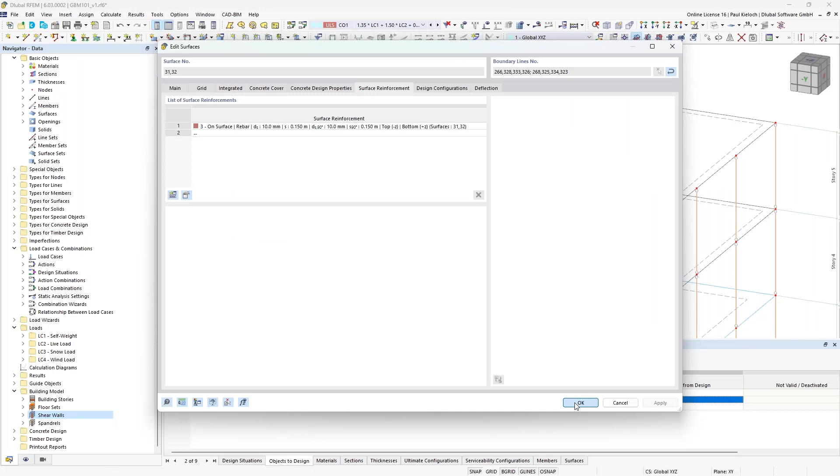And I will assign here also a reinforcement, and this time not by using a mesh, but using just the regular rebars here, confirming that and confirming that once again. And then I will select these two slabs here also for the design. Okay, then I will save this.

And with these settings, I think that everything was set up correctly, so I can start now the calculation, and the program will do the calculation for all of our load combinations in the same way like before with this regular static analysis calculation, the calculation of the 2D floor slabs, and rigidity to transmit the horizontal loads into the core of this building.

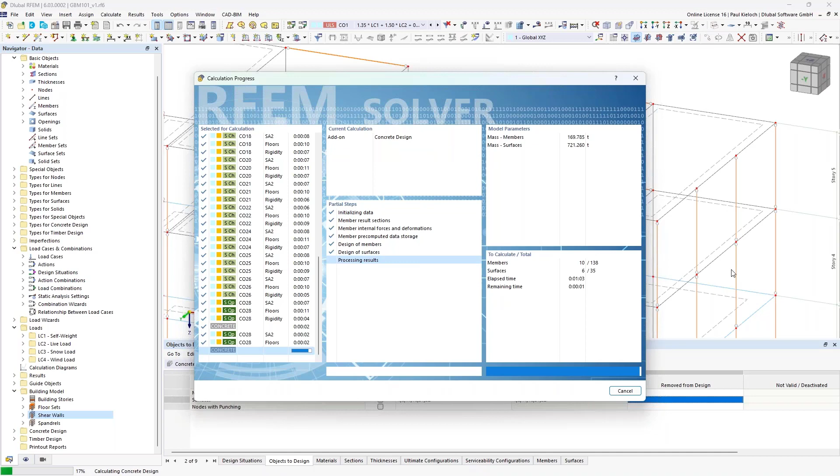Okay, I'm just waiting until the calculation is done, and then I will go over to the results and show you there the results for these objects from the building model. I guess it will be ready in some seconds. Okay, looks good till now. Okay, then maybe have a little bit to wait until the results will be displayed. That's also in combination with the app for this webinar today.

Now we have it. Okay, at first, let's take a look at the design check details for the members. In general, if you use the objects from the building model add-on, you will get exactly the same results like for regular beams. So, like I said before, the building model add-on is generating result beams, and these result beams are used for the design checks in concrete design add-on.

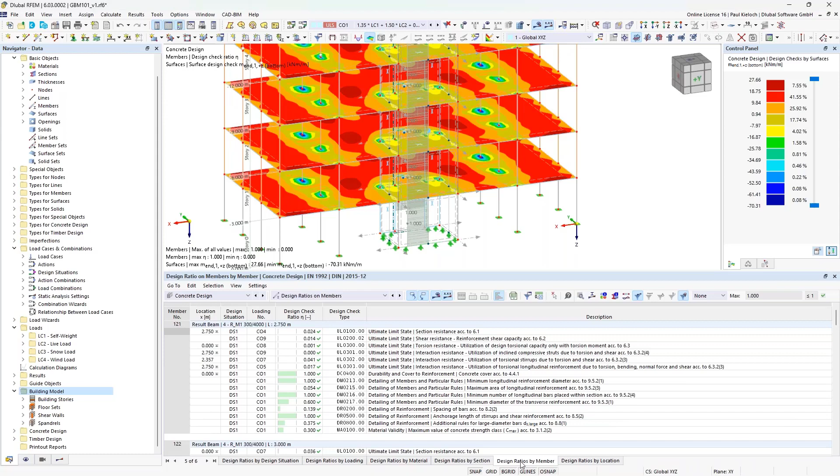So if we switch over to the table design ratios on members, and I'm selecting now one member like this one here, then you see that the program would now do the design checks here, especially the detailing design checks, according to chapter 9.5. So that means the program would recognize this member as a column. So currently, the program is calculating these result beams like regular beams, and in this case, the program would recognize this object as a column.

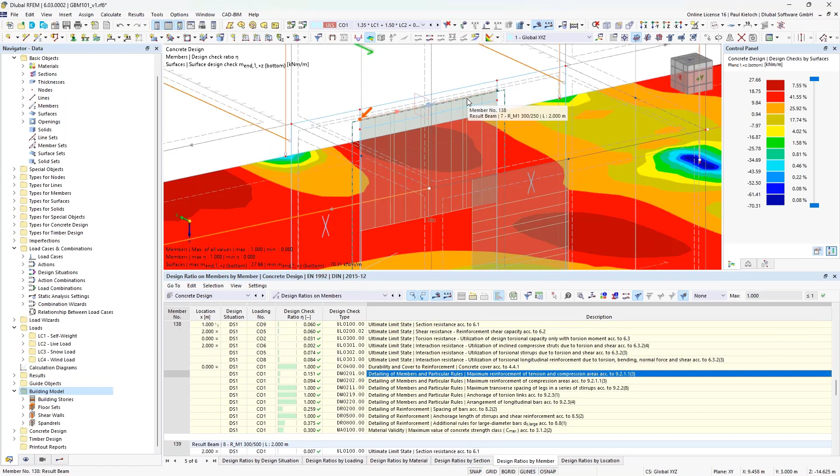If I'm clicking on a beam like this one here, then we have these design checks here, and there you see the detailing design checks according to chapter 9.2, so here we have the detailing design checks for a regular beam. That is currently some kind of intermediate state.

We are planning to extend the possibilities for this add-on in the future. So there will be an option here to design also directly new object types, shear walls and spandrels or deep beams. So these member objects will be separated into regular members, members for shear walls and members for spandrels. Then we will also implement the detailing design checks for deep beams and walls according to chapter 9.6 and 9.7 of the Eurocode as well. Currently, it's not implemented, so currently the program would do these design checks like for regular beams.

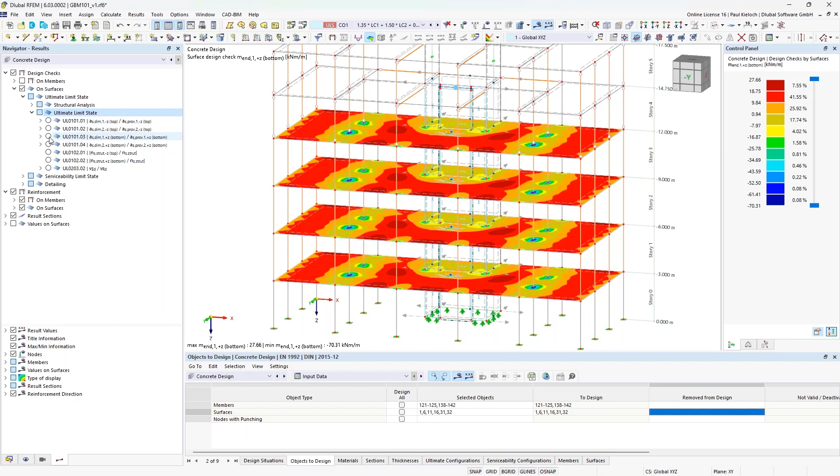One last change here in the concrete design add-on, if you are working with this floor slab rigid diaphragm stiffness type, is regarding the results. So if we switch over here, and I'm going to the design check on the surfaces, then in the first step, it looks like always, so regular results. We have here these design checks on the surfaces, for example, ultimate limit state, and then you can check the design checks, for example, for direction 1 on the bottom side. Maybe look like this.

And now if you open here this little arrow, then you get here new results. So this one is already known here. That is basically the required reinforcement or determined reinforcement. And now this is a new option here. And this comes directly from this calculation with the building model add-on.

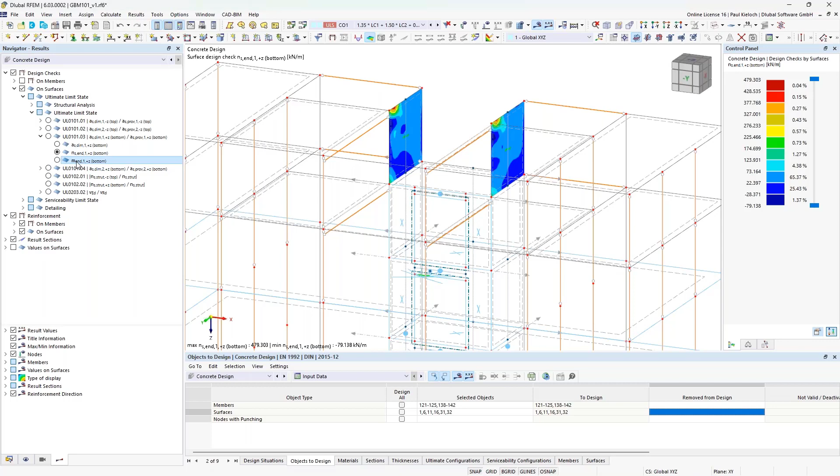So we have now here inside a 3D object or 3D structure, a separation between design membrane forces and design moments. So for these regular walls here on this end, that's why I've selected randomly these two slabs here, we have these regular design membrane forces. So it's like you would design regular 3D objects. And this new setting here in context of a 3D file is the design moment.

And you see here these design moments are coming from the approach that these slabs here with this stiffness type, just click on it, stiffness type floor slab rigid diaphragms, are now calculated like a 2D object inside a 3D structure. So basically, it's the same like you would do the calculation here by using this type of model 2D plate, but inside of a 3D building. So that is the benefit of using the building model add-on. So you can now do the 2D calculation of individual slabs inside a 3D structure.

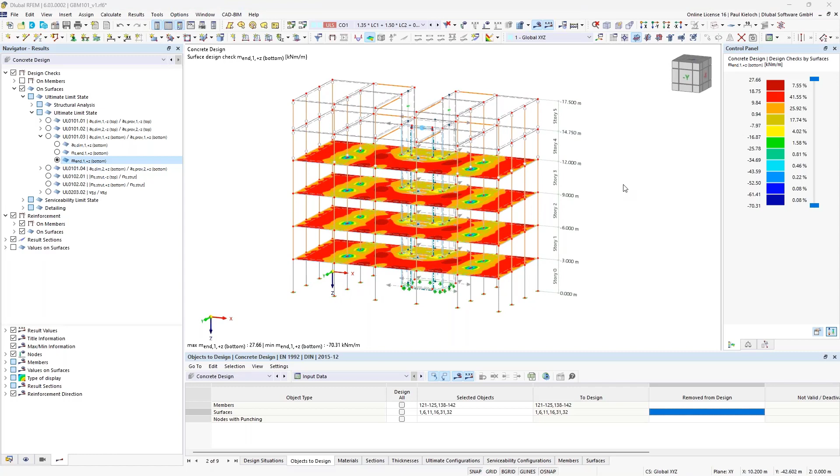I think I can. But you don't have to hand over the screen to me. If you may activate the static analysis in the navigator results, we can do it together. I just found it. Yeah, I looked at the wrong spot and just changed from design situation to any kind of load combination. Then you see it on the bottom there in the navigator. It's center of rigidity. On the bottom. Here it is. There it is.

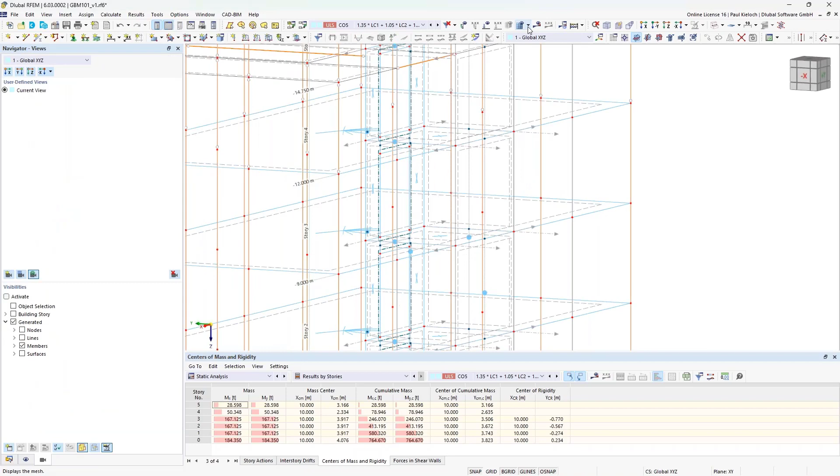There you see the blue nodes, bubbles. Maybe if you switch off surfaces. Results. Okay. Then you don't see it. It's a part of the results. So you see here these light blue bubbles, I guess. Yes, there it is. Okay. Then this is also cleared up, and I can hand over the screen to Andreas, I think.